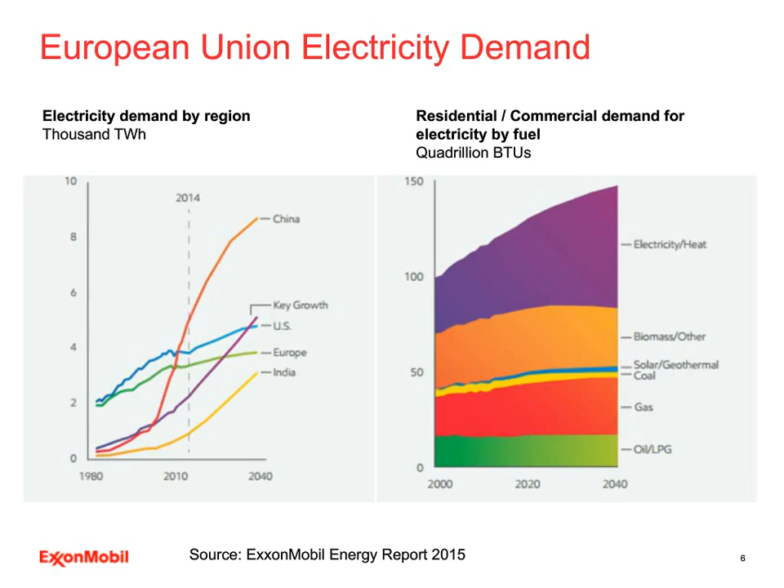Coming to the view on gas engine trends and equipment manufacturer demands. To meet the market requirements, the gas engine manufacturers need to offer and develop gas engine models who are able to fulfill the demand for inexpensive, sustainable and reliable power.

As the global demand for inexpensive, sustainable and reliable power increases, natural gas is increasingly seen as a good option for power generation. As the use of gas grows, it is a fact that the number of stationary gas engines will also increase. A good understanding of the gas engine equipment builder requirements is essential to ensure lubricant meets the needs of this changing and challenging market.

The gas engines have to operate with an increasing number of different gas types from different sources, like landfill sites, sewage sites, or digestion sites, and need to deliver electricity and heat with the highest efficiency. Selected for one fuel gas type, like biogas, the engine design needs to handle variable gas quality from the biogas source.

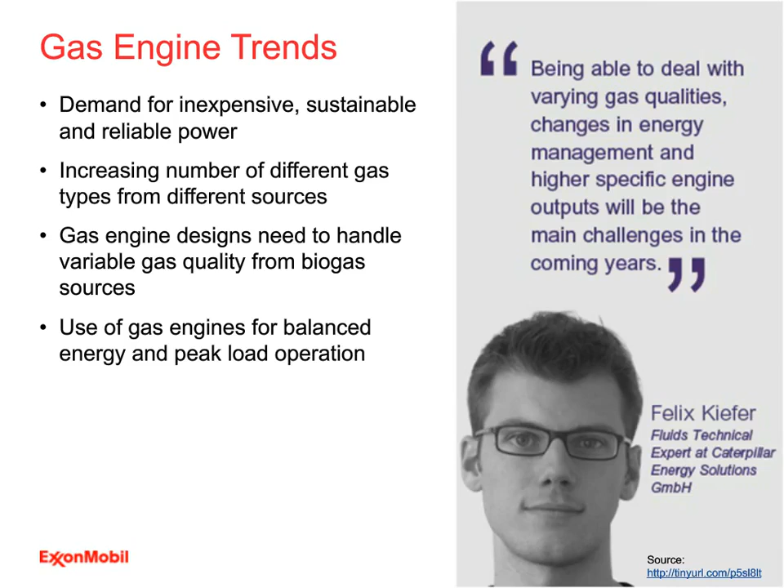Gas engine manufacturers develop their engines for a wide range of applications and available fuel gas quality. The key elements for the equipment builder of the gas engines are low operating costs, high and easy usability, and good serviceability of their engines.

Having the right combination of latest designed gas engine technology for the available fuel gas quality will lower the environmental impact of electricity production, will enable high engine power density and efficiency for a long time. Gas engines with long service intervals, long oil drain intervals, and extended engine lifetime will help to reduce the downtime of the engines.

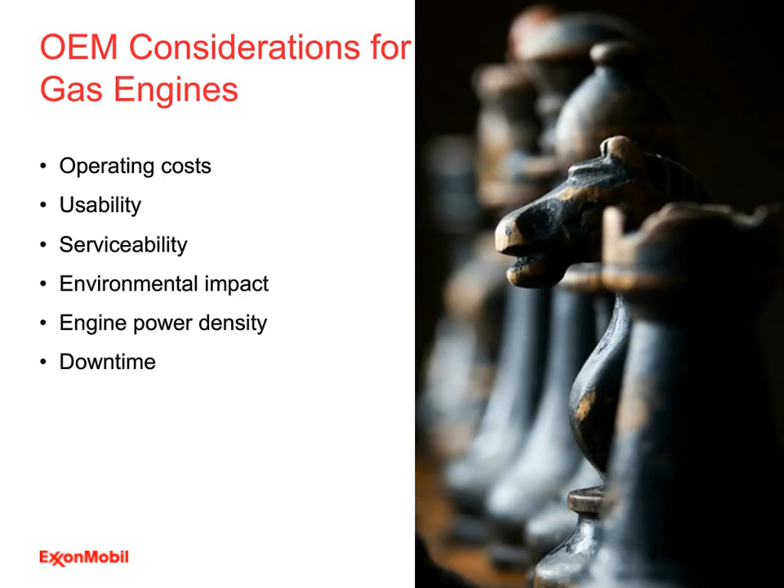The key element for the owner and operator of the gas engine equipment is to select a fair cost lubricant to meet his objective to decrease operating cost. That includes using the right gas engine oil quality in combination with the best balance between a long oil drain interval and the best engine protection.

The right oil quality and oil drain interval protect the engine from wear, keep the engine clean, and secured with high-quality used oil analysis like our Signum system, will make the owner and operator able to improve his engine efficiency and will enable him to reach longer service intervals and longer lifetime of his equipment.

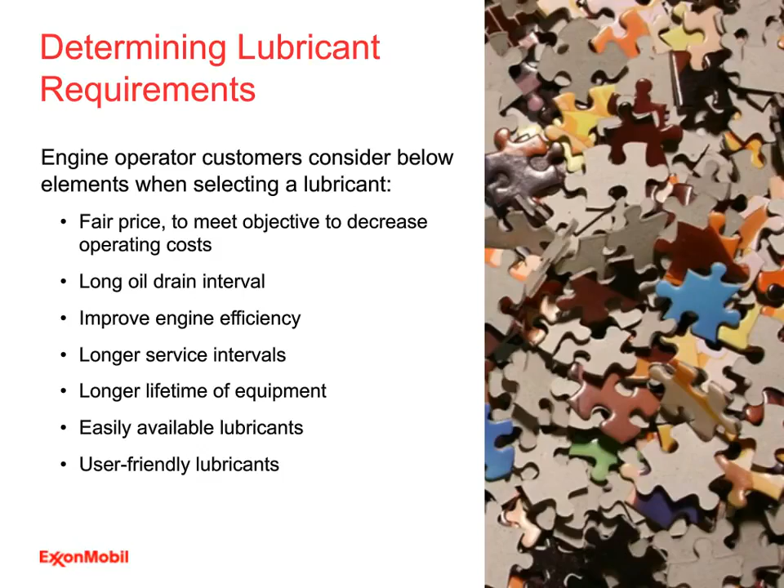The challenges with biogas, considerations and opportunities. But first, I now re-hand over to Annabelle for the first quick poll.

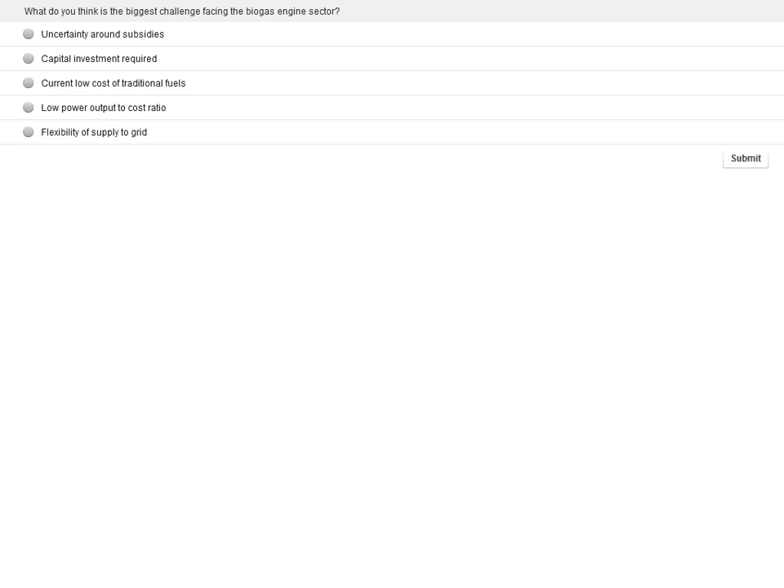Okay, so if we take a look at the results now. We've got very close results here, Oliver. And the lowest result is flexibility of the supply to grid.

Why do you think that is, Oliver? Yeah, I think the results look like I expected them. It's more than one parameter that's important for electricity production and also for the biogas sector. So it's exactly what I expected.

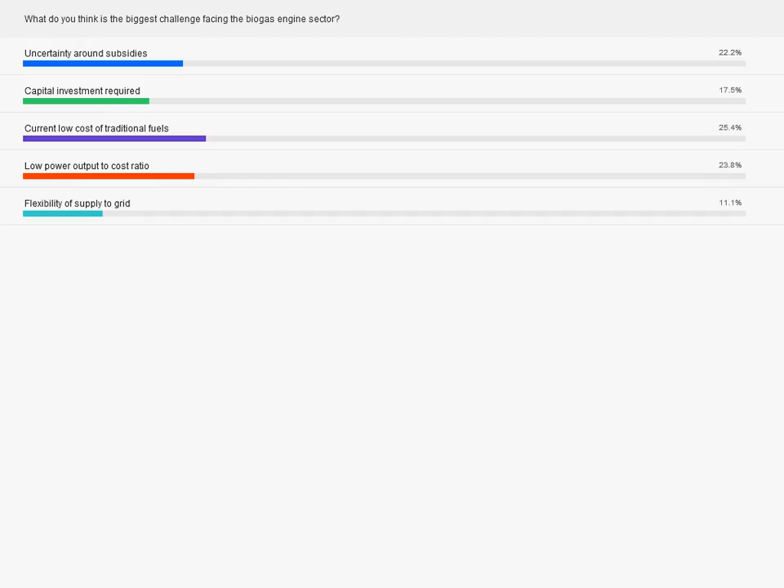To select the right gas engine oil for a biogas application, it is important to know the source and composition of the fuel gas, in combination with the engine manufacturer and engine model.

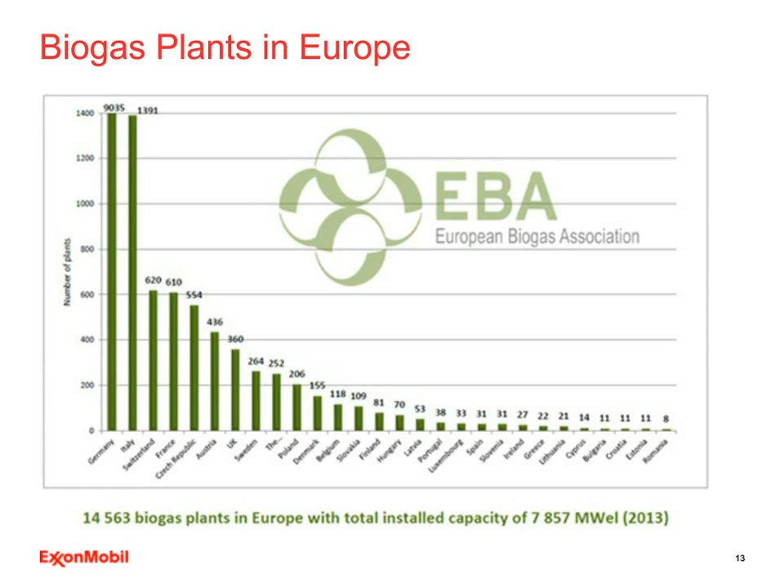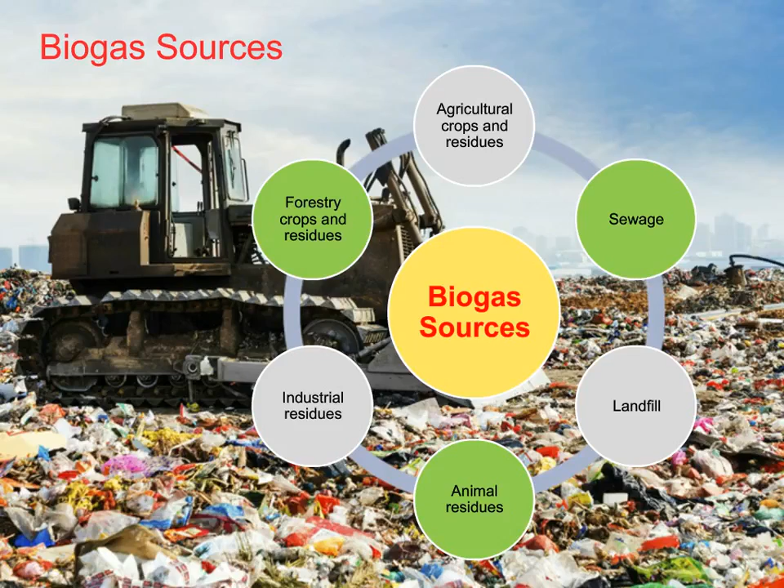Looking at landfill gas: to operate a gas engine with landfill gas, the challenges are the siloxane content and the variable gas quality in general.

Siloxanes are forms of silicon combined with oxygen and methyl in a linear or cyclic arrangement. These are generated from the disposal of products such as cosmetics, shampoos, deodorants, suntan creams, silicone polish, etc., and create deposits in the combustion area of the engine.

Other harmful landfill gas contaminations like hydrogen sulfide or halogenated components can react in the combustion process to form aggressive components in the gas engine. The hydrogen sulfide and halogenated components react with water in the combustion process to form sulfuric, hydrochloric, or hydrofluoric acid. These can be very corrosive, and if not dealt with, engine damage can occur in a very short period of time.

The lubrication challenges for landfill gas applications are to counteract against aggressive contaminants and neutralize them, to reduce and control wear in piston rings and cylinder liners in the presence of deposits from the siloxanes, and to extend oil drain intervals as requested by most owners and operators.

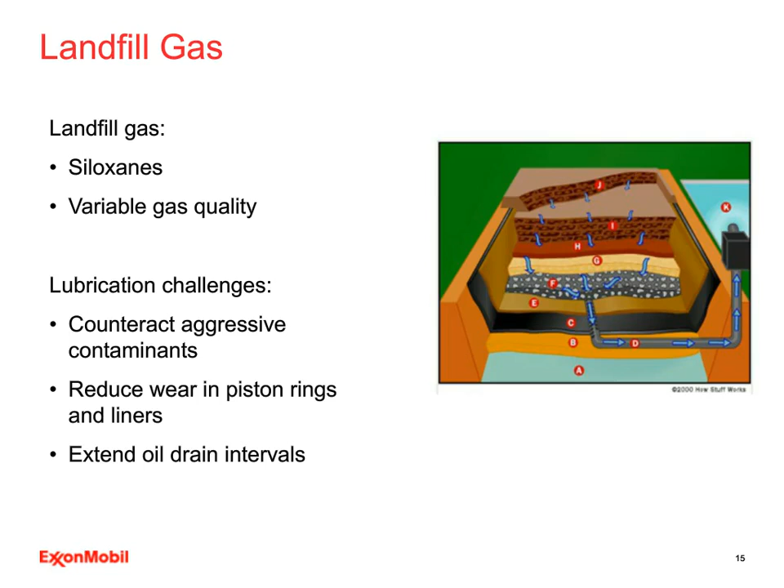Now let's have a look at biomass and sewage gas. For biomass or sewage gas applications, the challenges to operate a gas engine with are the contents of hydrogen sulfides and the variable gas quality in general.

Sewage gas is formed from the bacterial decomposition of sewage sludge, agricultural or vegetable waste. It contains varying contents of hydrogen sulfides and siloxanes as contaminations. The methane content also varies, typically between 50 up to 70%, combined with 20 up to 30% carbon dioxide and high gas humidity.

The lubrication challenges for biomass and sewage gas applications are to counteract against aggressive contaminants due to the higher corrosion potential in sewage gas applications, because the sewage gas or biogas tends to have a high moisture content, forming sulfuric acid during the combustion process with the hydrogen sulfides, and to extend oil drain intervals as requested by most customers.

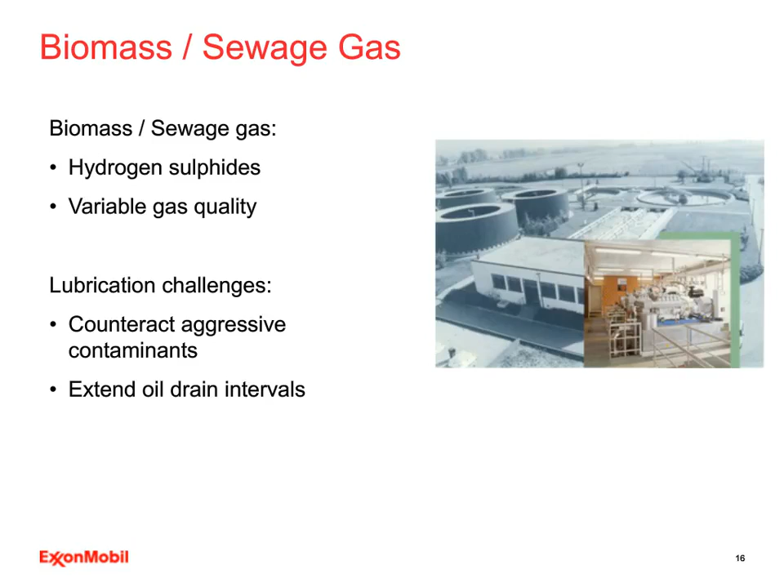So having a closer look at the siloxanes: landfill, biomass and sewage gas can contain up to 1% by volume of halides, volatile organic compounds, and siloxanes, depending a lot on the selected site. Cosmetics, shampoos, deodorants, suntan creams, silicone polish, etc. are common sources for the siloxanes.

Siloxanes form silicon dioxide in the combustion chamber of the gas engine, resulting in accelerated wear in cylinder liners and piston rings. Gas engine builders set specifications for gaseous fuels to ensure engine durability by setting limitations for fuel gas contamination and also for contamination in the used gas engine oil.

Traditional gas tests that can show levels of hydrogen sulfides or halogenated compounds do not detect these siloxanes, and special tests need to be carried out in order to determine any potential problem before installing an engine.

In service, the effects of the siloxanes rapidly show up in used oil, and silicon levels over 50 parts per million can lead to problems depending on the engine type.

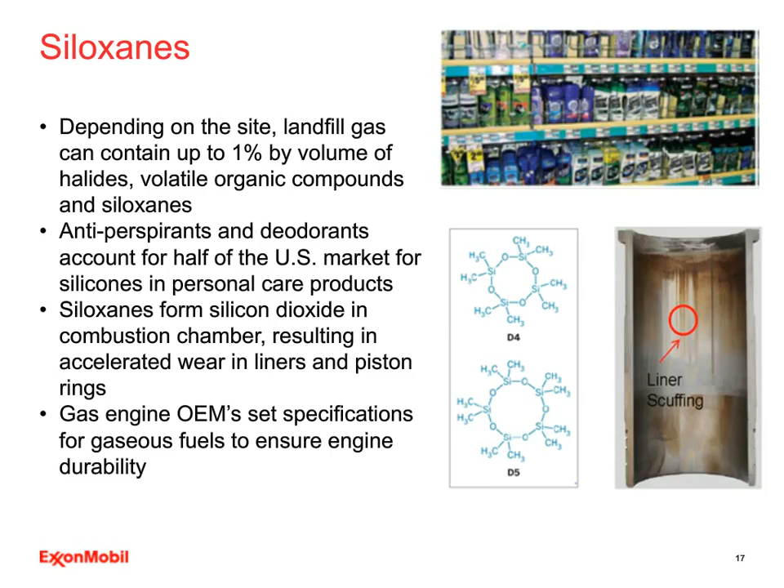Piston skirt and worm tracking. Landfill gas contaminants, which form acids and silicon oxides, can be the reason for piston skirt damage due to corrosion and wear, like etching patterns and worm tracking.

Along with outstanding anti-wear and anti-scuff performance, our Mobil Pegasus 605 Ultra 40 offers exceptional carbon and varnish deposit control, mitigating some of the challenges of operating engines on biomass and landfill gas.

Contaminants such as halides, sulfides, and siloxanes, which can be present at high levels in these gases, can accelerate wear, compromising engine durability. Mobil Pegasus 605 Ultra 40 is formulated to overcome the challenges posed by impurities that exist in gases from landfill, and it can simultaneously help customers improve power output by extending oil drain intervals and protecting the engine against corrosion, wear, and deposit formation.

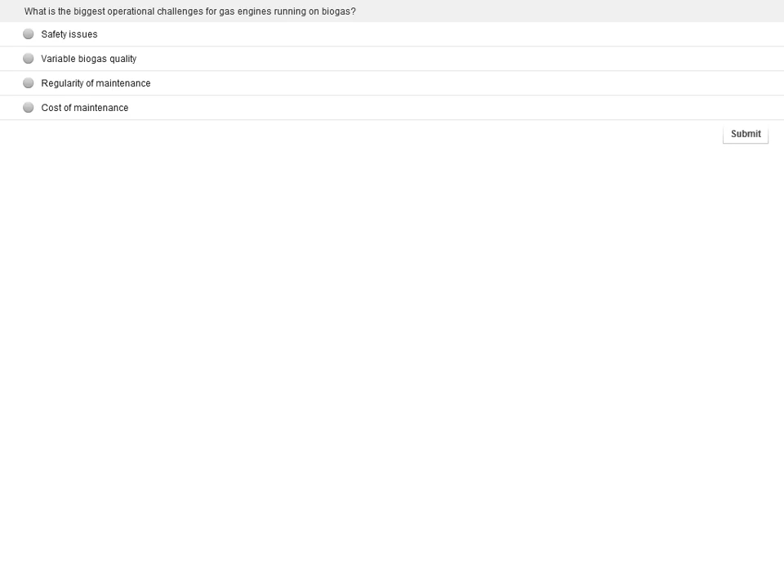Okay, so quite a large percentage there, 75% on variable biogas quality. Are those results interesting to you?

Yeah, so as I have mentioned on the slides before, and as mentioned also by Felix Kiefer from Caterpillar Energy Solutions, it is the biggest challenge to handle the variable biogas quality. Yeah, that's it.

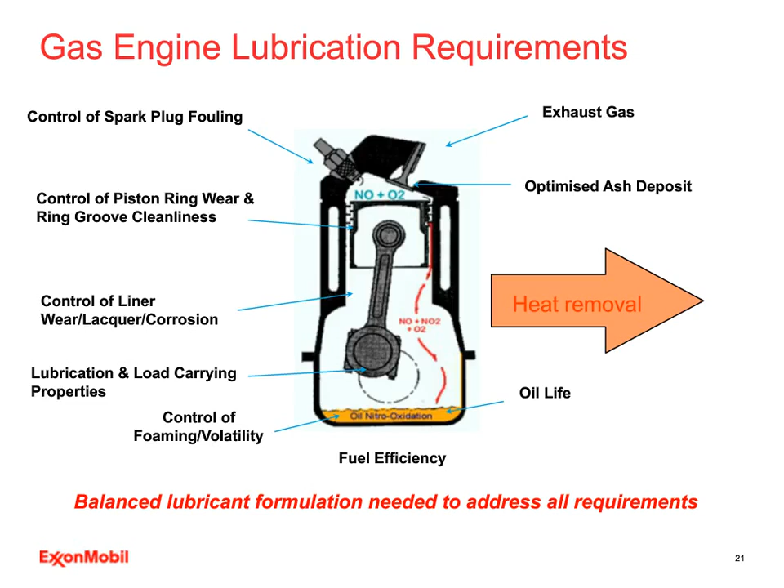Pegasus gas engine oils are unique in that they are component-based formulations. This means that each of the additives and base stocks are selected specifically to provide the best performance. This formulation approach allows Pegasus gas engine oils to differentiate themselves versus competitors, many of which use additive packages.

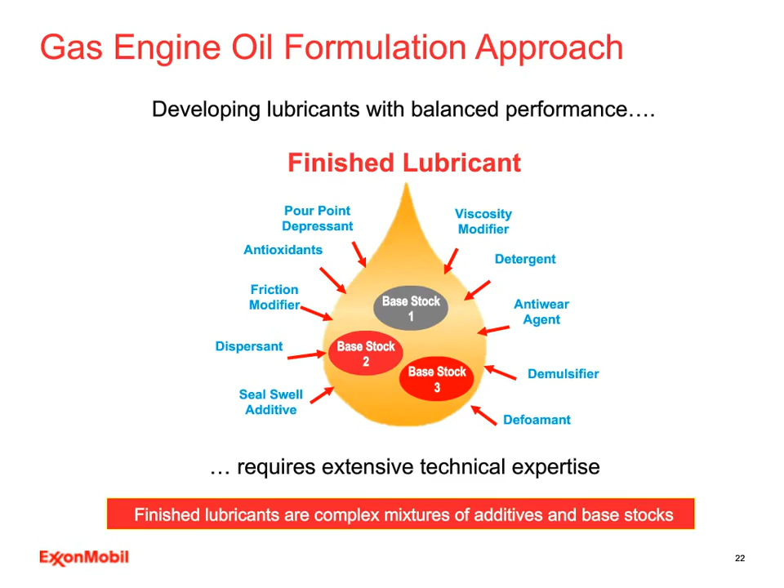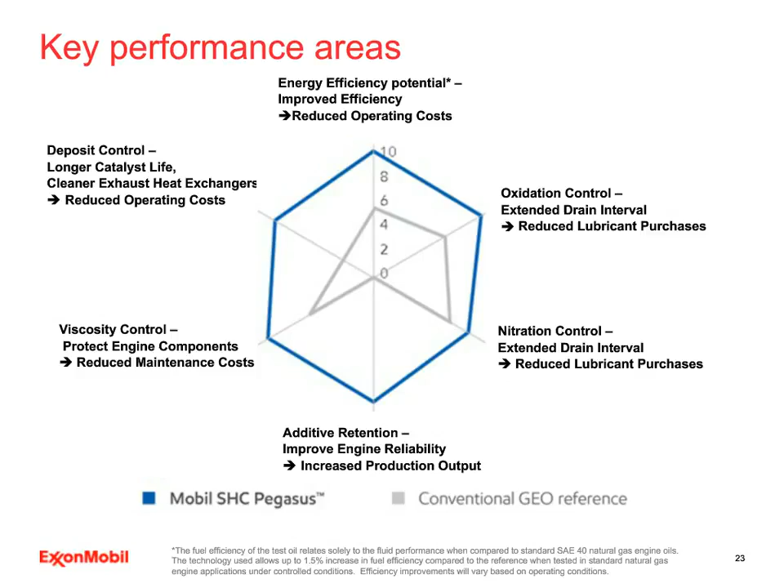So I'd like to now turn it back over to Annabelle for the next quick poll.

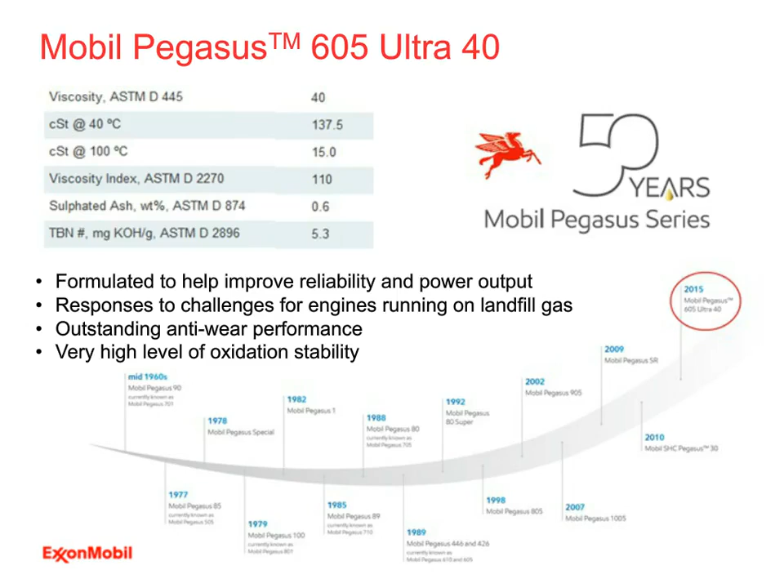Mobil Pegasus 605 Ultra was tested in side-by-side engines with current Mobil Pegasus 605. Mobil Pegasus 605 Ultra was able to provide equivalent to improved engine durability and piston cleanliness in areas of wear, corrosion protection, and deposit control at double the oil drain interval.

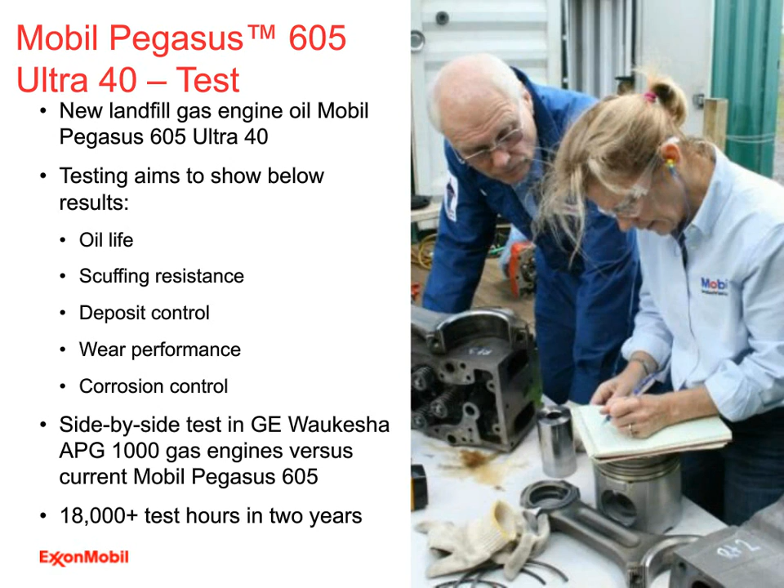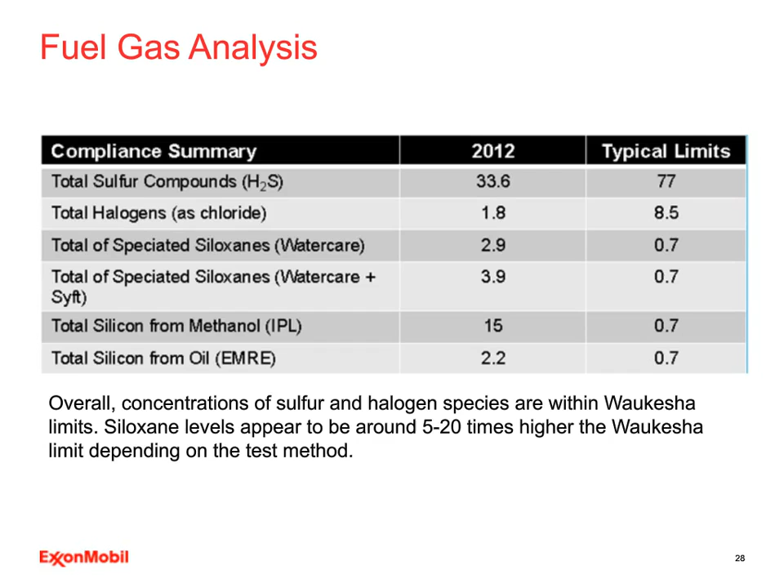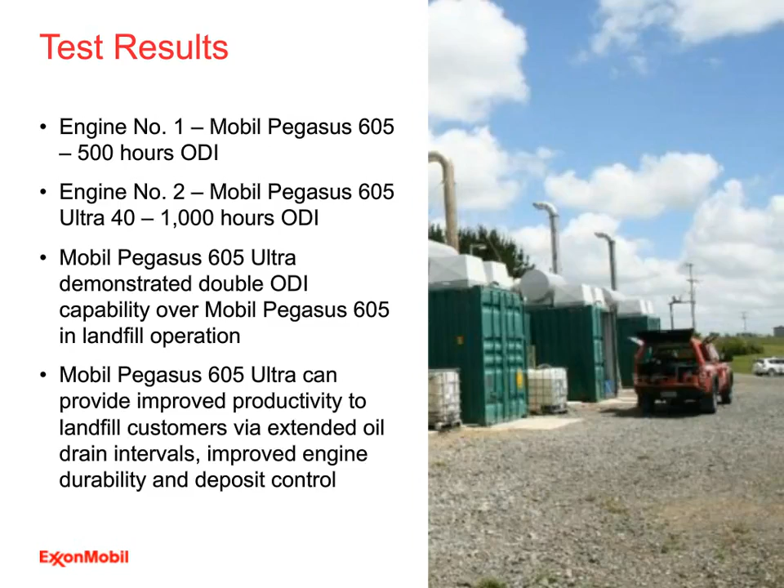This field test started at 500-hour oil drain intervals with Mobil Pegasus 605, and we were able to extend the oil drain interval to 1,000 hours, over double the oil drain interval, by the conclusion of the test.

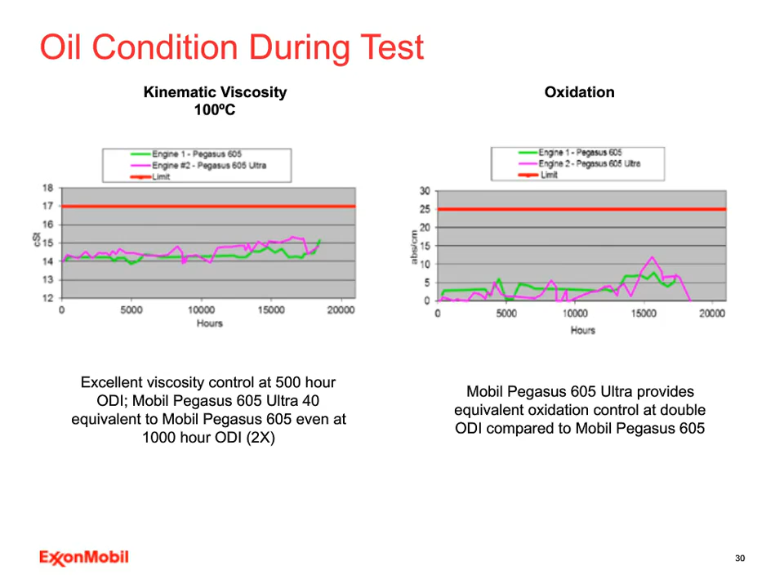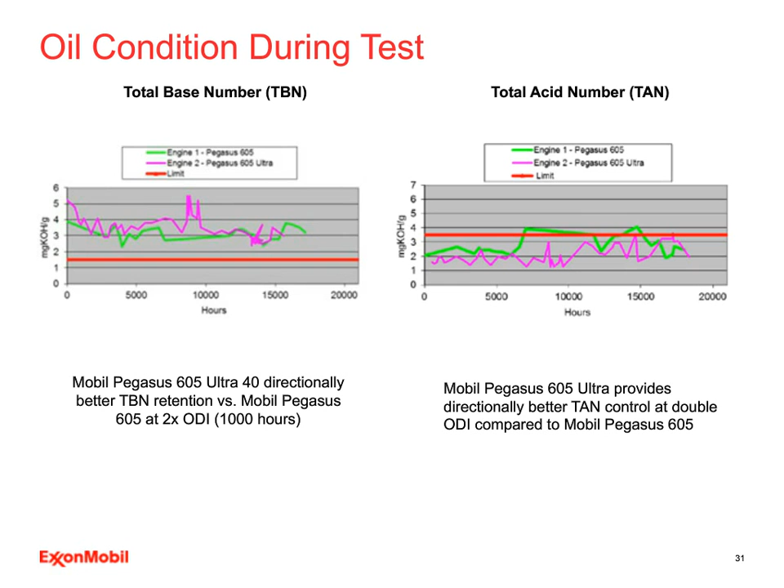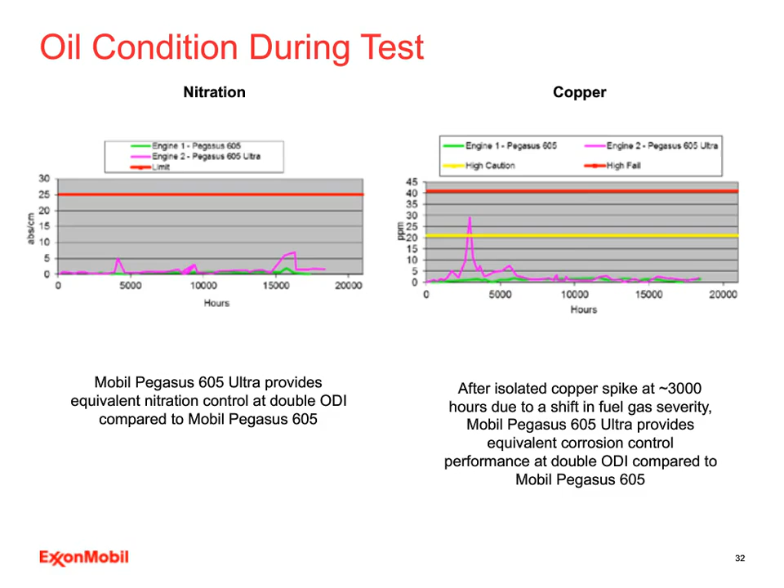In addition to monitoring used oil parameters, we also conduct a full engine inspection at the conclusion of all our field tests. Mobil Pegasus 605 was evaluated for its impact on engine durability, specifically cylinder liners and connecting rod bearings as shown here. You can clearly see an improvement in scuffing resistance and wear performance with Mobil Pegasus 605 Ultra.

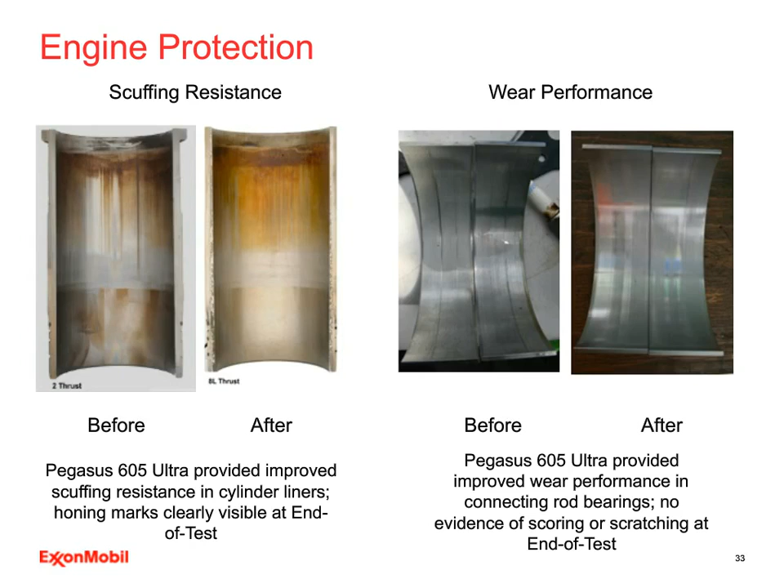Piston cleanliness was also evaluated during the field test. Here are the before and after photos of two pistons. Clearly, there are less deposits on the piston lands and grooves, demonstrating the excellent deposit control performance of Mobil Pegasus 605 Ultra.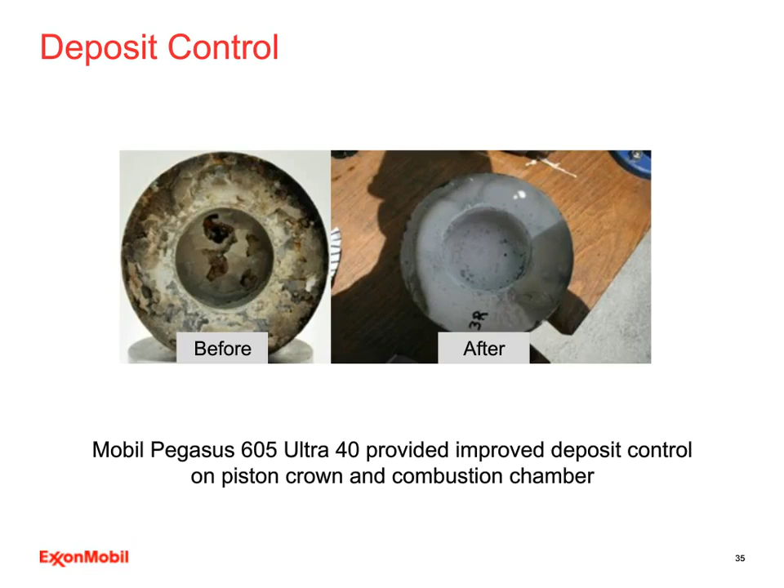Mobil Pegasus 605 Ultra provided excellent oil life and engine durability in this 18,000-hour high-severity siloxane field test. I will now conclude the presentation with a discussion of future trends and a summary.

There are several trends in the gas engine oil industry. They include energy efficiency, which results from higher compression ratios and operating pressures and temperatures. These conditions greatly increase the demand on lubricant performance.

ExxonMobil is an industry leader, with the launch of Mobil SHC Pegasus, the first gas engine oil which has the potential to deliver up to a 1.5% reduction in fuel consumption.

Another trend is towards lower emission requirements. This results in an increased use of after-treatment devices on stationary gas engines and more focus on protecting those investments. Lower emission requirements also are impacting the types of applications where gas engines can be implemented.

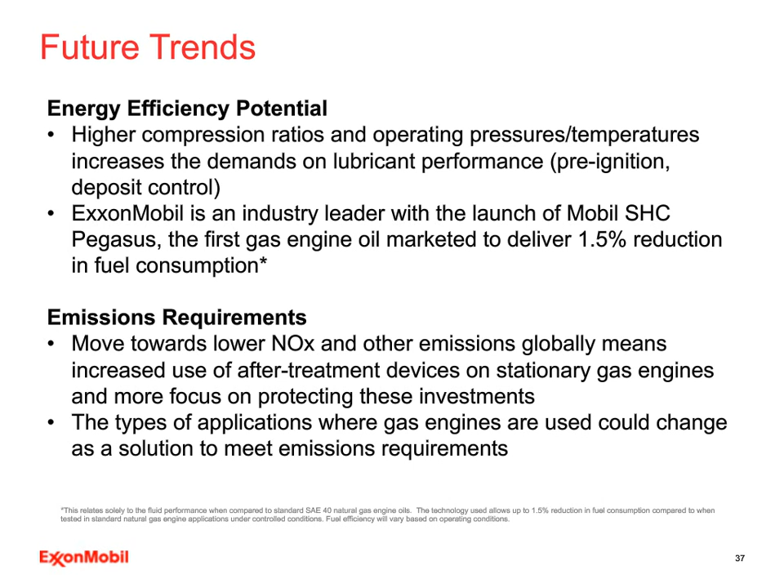In conclusion, there are many specific challenges within the biogas and landfill industry, such as those posed by the impurities that exist in the gases from landfills. It is crucial to select the right lubricant for your operation.

Plants can accrue significant savings with the implementation of an advanced gas engine oil which can protect gas engines. Choosing the optimum lubricant for your operation can help to increase productivity, reduce downtime, and save on maintenance costs.

For further guidance on selecting the right lubricant for your operations, please contact the Technical Help Desk or your local Mobil lubricants distributor.